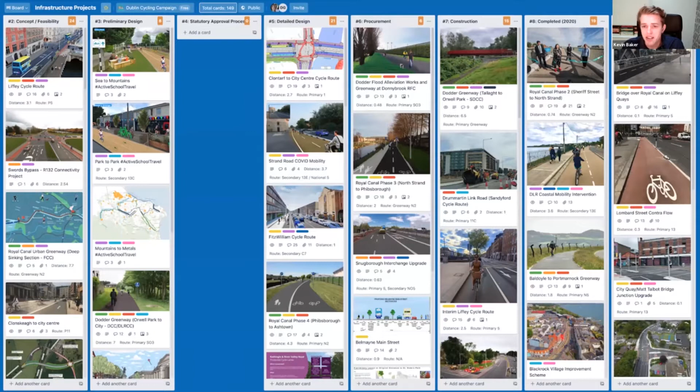So we took a lot of that information and combined it down into these next few slides.

At the same time, though, not every kilometer is created equal. We could build a whole lot of kilometers of cycle track that don't connect places together, that go through parklands that people don't want to cycle through. We could build a whole load of new cycle track in industrial estates on the west of Dublin, where very few people need them—well, people do need them, but there's not a huge demand—instead of building stuff in the city centre.

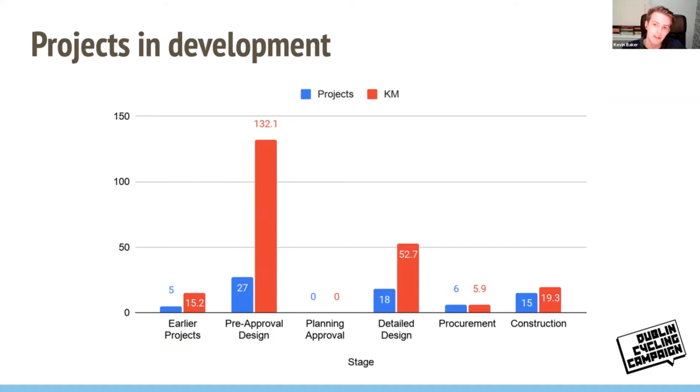Okay, so if we were to map out the cycle network that we have in Dublin right now, this is what it looks like. What I'm counting here is mandatory cycle lanes that are 24-hour, more than 1.7 meters wide - a proper painted cycle lane - and I'm counting things that are curb protected, and that's it.

That's not a network. That's little bits of green lines scattered all over a map. There's not a huge amount of stuff in there.

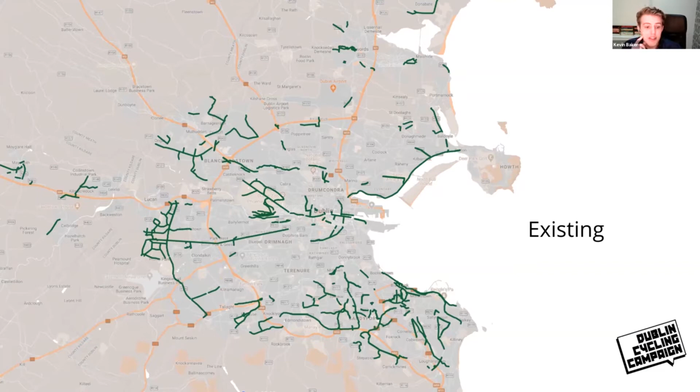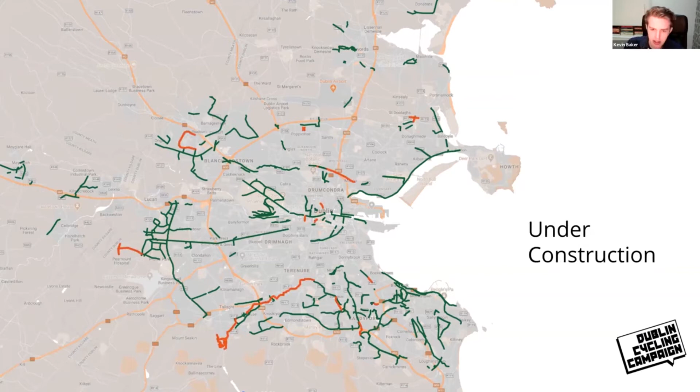Okay, if we add in all the things that are under construction right now, we get to that. If we add in all of the projects with planning approval, we get to this stage.

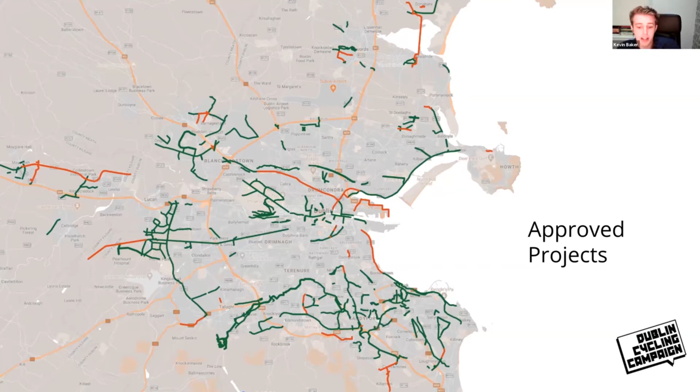So some of the things we see are sections of the Royal Canal in the city centre, Clontarf to city centre, the Grand Canal, the Royal Canal out to Maynooth, and kind of the Malahide to Donabate Greenway in the north there, and Strand Road - the big ones are in that list.

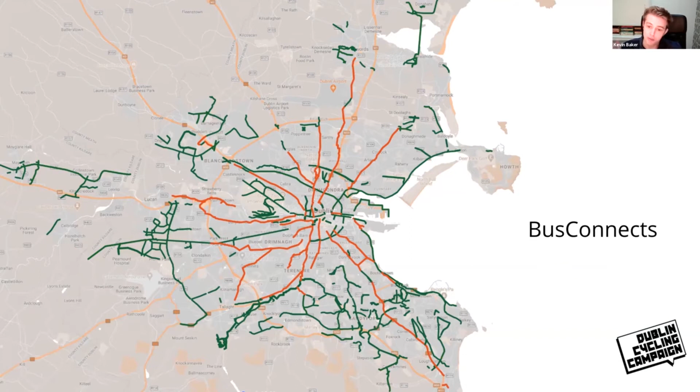If we add in all of the BusConnects plans, and that project is still a good few years away, and some of it might not be finished construction for 7, 8, 10 years from now, we get to that.

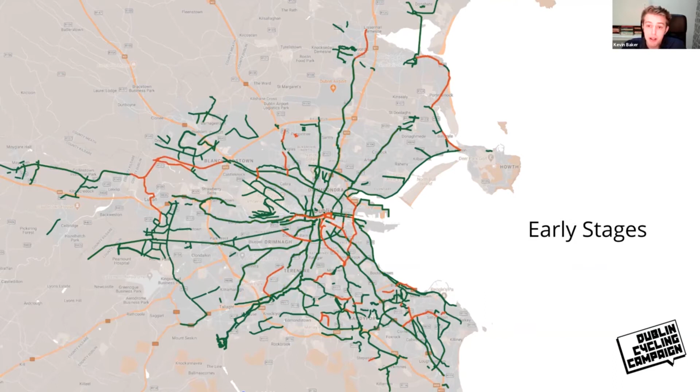If we add in all of the other projects that are in early stages of development that have some kind of published plan, we add in that. And so to some extent, if we were to take all of the plans we have right now and build them, we would get to this. That's starting to look a bit more like a network.

There's obviously still huge gaps in places. I think particularly if you look down at Dún Laoghaire and the bottom right-hand corner of the map, you start to see maybe the density of the green lines you might want to see.

To some extent, this is not about just building a cycle route from every suburb to the city centre. This is about making sure that people can cycle around their local area as well. They can cycle to the shops, they can cycle to meet their friends, they can cycle to the GAA club.

Obviously there's still lots of gaps in this. I think one of the big standout areas is Raheny, Artane, Beaumont. Besides the Malahide Road, there's no plans up there.

There's a big need for more stuff around Blanchardstown as well, around Tallaght, and other areas. To some extent, what we have in the planning pipeline is nowhere near enough to where we need to get ourselves. But that's okay, because to some extent we're saying we can build it in 20 years. So we still have time to come up with new plans and start moving those through the process as well.

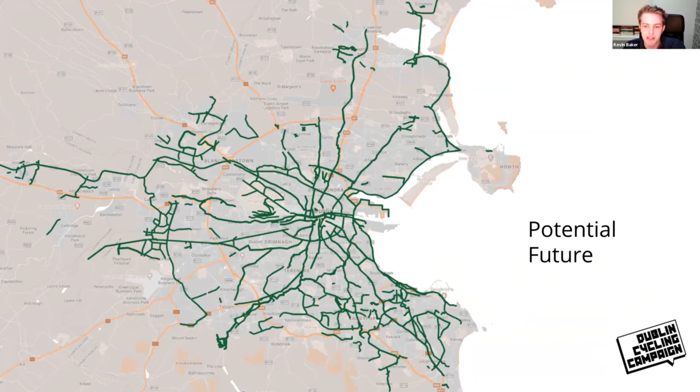Okay, so I suppose one of the big things about cycling infrastructure is it is a massive chicken and egg problem.

I have heard maybe not exactly this quote, but almost exactly this quote from far too many key decision makers in Ireland. I'm not going to name any names or any government departments, but I'm sure some of you could maybe guess: 'Cycling is a niche activity for a small subsection of the population. Investing in cycling won't make a meaningful contribution to Ireland's transport problems.'

And to some extent we hear this because they look at the numbers of people cycling right now, where in some areas of Dublin less than 2% of trips are by bike. In the city centre we're maybe 13%, maybe 20%, somewhere in that range. So it's a small subsection. They don't see the potential.

And so to some extent we've always turned around and said you have to believe this is possible. And the way we tell them to believe is by looking at the Netherlands. Look at the massive groups of people from all walks of society who cycle as part of their normal everyday life. Families cycling in the Netherlands is super common. So are older people. It is possible to do this.

So 'seeing is believing' is actually not the full quote. The full quote is 'seeing is believing, but feeling is the truth.' It's from an 18th century English philosopher, I believe. What he's saying is that seeing is only believing, but it's when you start to feel it, when you experience it, that it's actually real. To some extent, I think we're starting to see in certain points of Dublin this become reality. And as a result, it's much easier to feel this idea that cycling could be for everyone if we design for it.

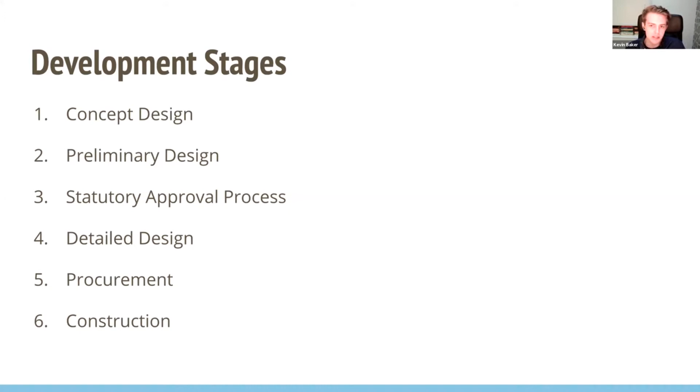The next step is procurement, where they take these designs, go out to tender, and get a contractor to build the project. The last step is construction. All these projects take some length of time to build - it's not uncommon to see projects take a year, two years, three years to construct on the road.

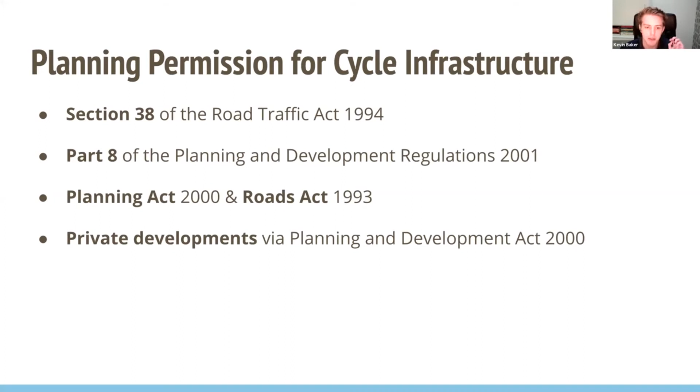I really want to dig into the planning process, because this can be really useful as we move into the final step about how to speed the process up. There are four main ways that cycle infrastructure gets built: Section 38 of the Road Traffic Act, Part 8 of the Planning and Development Regulations, the Planning and the Roads Act, and private developers. Let's dig into some of these.

Section 38 of the Road Traffic Act allows council officials to make changes to the road for traffic calming reasons, and this includes cycle lanes. They can only change existing roads - there cannot be any road widening. For the most part, they need to stay within the existing curbs.

This only needs the council official's approval. It's not a decision made by councillors. The approval process for this can range from anywhere from 2 weeks to 8 weeks. I've seen some projects take 8 months, but for the most part, it's very, very quick.

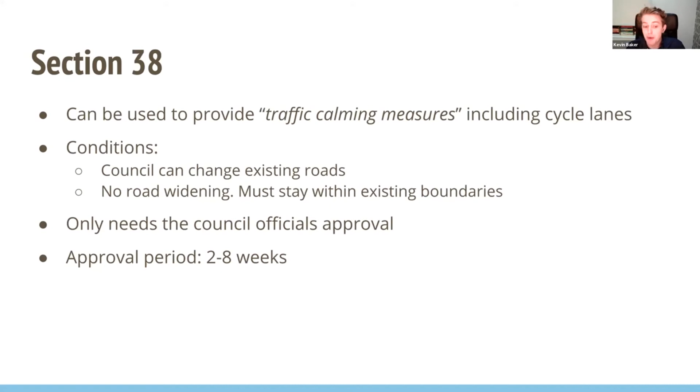So I'll give you an idea as to what can be done with Section 38. The contraflow on Lombard Street in the city centre is a Section 38. The Grangegorman Road Lower filtered permeability, a set of bollards to stop rat running on a residential road, is also Section 38.

The interim Liffey cycle route project - while the council officials did to some extent ask for the consent of the councillors before they built this project, they didn't need to, but they thought it was good practice to.

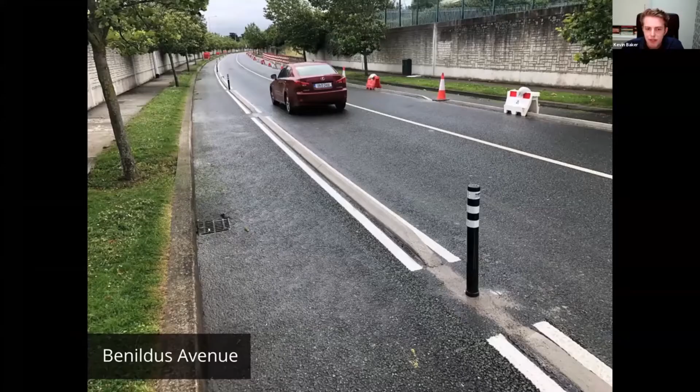The Benildus Avenue project in Dún Laoghaire, kind of in Sandyford - these new concrete curbs were done under Section 38. They stayed within the existing road. All they did was change the existing road.

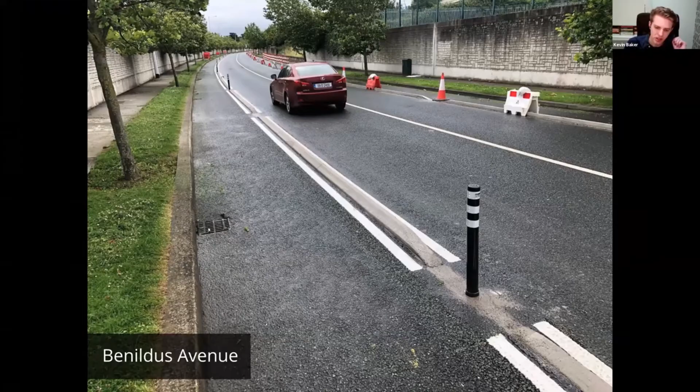And then, to some extent, the biggest and best example is the coastal mobility route. They took an existing 2-way road, made it 1-way, and installed a 2-way cycle track. Change within the existing road - they reallocated road space.

Okay, the next big one is Part 8. The council will take some project and effectively apply for planning permission to themselves. They publish the project, ask for submissions from the public, and the councillors vote to approve or reject the project. The timeline here is you need a proper planning application.

While a Section 38 does require some documentation beforehand, a Part 8 requires the same amount of planning application that you would need if you wanted to redesign your house or build a new commercial building. That planning application is a somewhat lengthy process that can take 3 to 9 months. The approval process is 20 weeks as laid down in the law, so that's about another 4 months. So Section 38 is weeks, this is months.

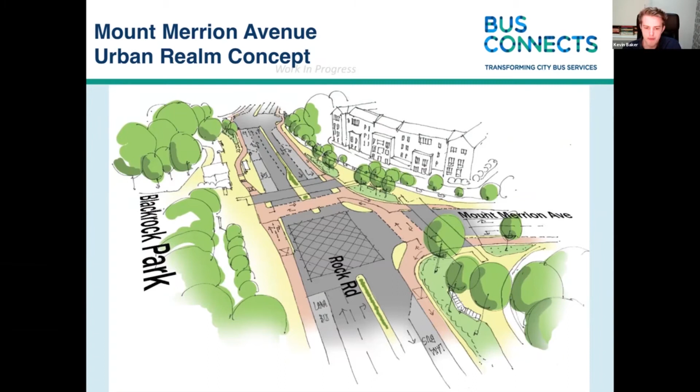Okay, the last smaller section is private developers, who can deliver some amount of cycle infrastructure. The quality varies dramatically - some of it's really good, most of it's not.

The other is developers sometimes build, if they have a large enough area, large enough development, they might build their own internal cycle network.

Okay, I want to run through just 3 example projects because I think they're really useful for understanding how some of these projects move through the process and where some of the delays come from.

The first one I want to look at is the Clontarf to City Centre project. It's a 2.7 kilometre project from Alfie Byrne Road to Talbot Street along North Strand. Anyone who comes from the S2S or Malahide Road knows this section of road is awful, particularly the section at North Strand Bridge, where I have been close passed every single time I have ever cycled over that by either a bus or a taxi. It's just an awful section of road.

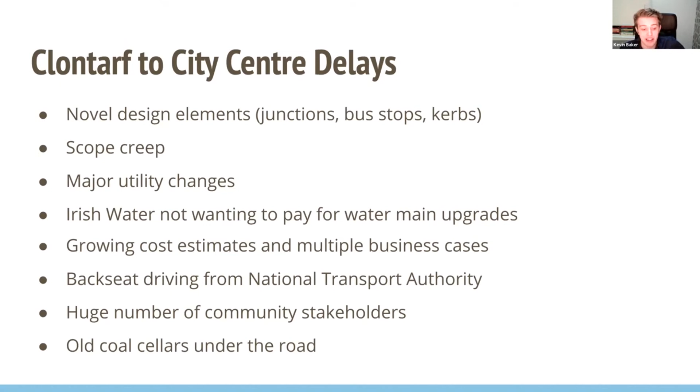There's a huge number of community stakeholders, and as this is an old road, there's a lot of old coal cellars under the road, particularly in the North Strand area, which they don't know if they have been filled in correctly or not. And so when you're trying to build a new road on top of them, the engineers obviously need to know what they're building on top of. And so surveying the coal cellars, I think, has slowed this project down by about 6 to 9 months, at least on its own.

So the timeline for this has been slipping a lot. The plan was not for this to take 9 years. So the way to read this table is: in September 2019, the original completion date was Q4 2021. The latest date we have now, from November 2020, is that this project will finish in Q1 2023. And as you can see, every month when we get a project update, this thing slips just a little bit further down the timeline. This thing just keeps not happening.

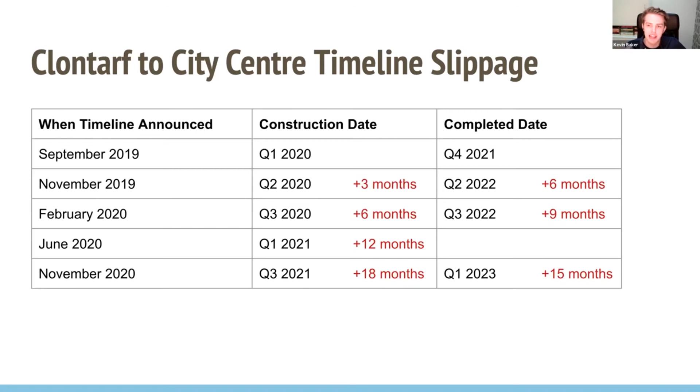Might also look at Royal Canal Greenway Phase 2. This is a fantastic new project. It runs from around Sheriff Street, through an old section of the canal that's been totally inaccessible for decades, under the Dublin to Belfast Railway, and then over another railway line to join up with North Strand Road.

This received planning approval in December 2015 and opened in July 2020. So it's about 4.5 to 5 years from planning approval to opening. There was about 18 months to 2 years of design work before planning approval. So we're looking at 7 years or so for this project.

Some of the delay reasons were Irish Rail and Waterways Ireland. Waterways Ireland own the canal, Irish Rail - they're going under one railway and over another, so they need to be consulted. I understand they are not the easiest state bodies to work with.

There was confusion to some extent as to whether or not the cycling bridge over the railway was tall enough, depending on the different versions of the Dart expansion plan being worked through - would that bridge be high enough to take double track electric trains underneath or not? That complicated the design. It was: can we make a decision? Can we not make a decision? This all slows things down.

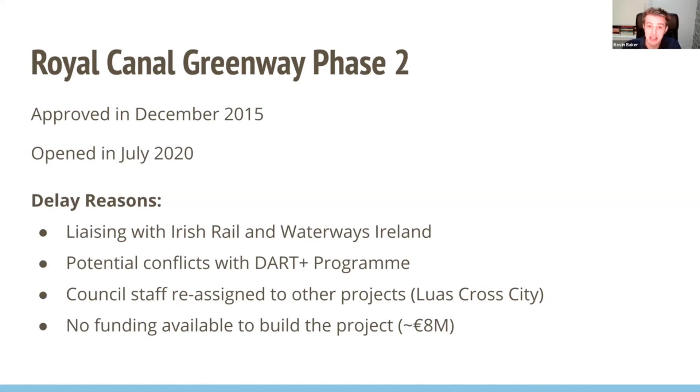I also want to look at a project that was abandoned - the Sandymount to Blackrock project. It was announced in 2016 and officially abandoned in 2018. The proposal was to build a two-way cycle track along Strand Road and out along the coast to Blackrock. This is part of the S2S and some other projects in the area.

There were a huge number of complaints - 680 submissions - of which only a handful were supportive of any aspect of the project. There were huge complaints about making Seapoint Avenue one way, which was just done by the Coastal Mobility Route. There were huge objections to some compulsory purchases required along Strand Road, Peoples Front Gardens, and complaints over a new road bridge in order to close Merrion Gates.

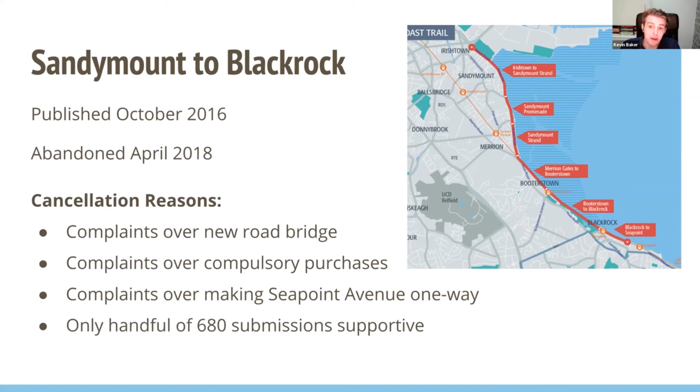Interestingly, their solution for Strand Road was to build a cantilevered boardwalk in order to maintain the 2 traffic lanes and provide the cycling infrastructure and a space for pedestrians. This is very different to what the Dublin City Council Strand Road project is today, which is to make the road one way with a 2-way cycle track.

I can tell you, if this project hadn't been shot down 2-3 years back, it'd probably still be going through the design and planning phases at this stage. From an infrastructural perspective, this is a very complicated project right beside the coast, which is environmentally protected. So to some extent, this project getting shut down was maybe a good thing, because it means we've cleared the way for the Strand Road cycle route now - this 2-way on-road cycle track - which is going to be built, I think the council last said, on the 15th of January next year. So we're very close to seeing that delivered.

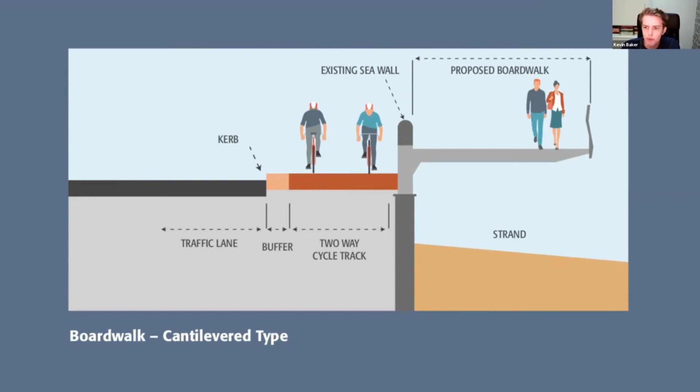Okay, so I want to talk you through what are the current plans from some of the key bodies here.

This is a cycling implementation plan 2020 to 2024. It was written by the National Transport Authority, but it was never published. We received a copy using Freedom of Information. This was never published because just before they were about to publish it, the pandemic hit and we realized that transport was about to change dramatically, and so this plan really didn't make that much more sense.

The other thing that has changed since this plan was written is we have a new program for government, which includes significantly more funding for cycling.

One of the interesting tables in this whole document is about the amount of time it should take projects to move through the various stages. Their idea is that it should take 3 to 4 years for projects to go from the very first stage to completion.

I'm going to be pretty honest, I've never seen a project move through the detailed design phase in 6 months. The shortest I've seen is 9, and many projects have spent 2 or 3 years in detailed design. So to some extent, this timeline in the NTA's cycling implementation plan is a little optimistic.

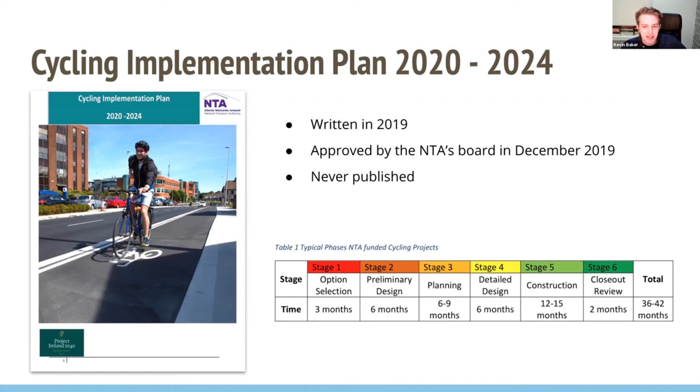To some extent, they started trying to do the maths on estimating how much cycle infrastructure they could build over the next 5 years. They think in Dublin they can build about 110 kilometers, with another 50 kilometers from Bus Connects. So that's 32 kilometers per year. That's pretty much what we've done in 2020. So what they're saying is we need to do a 2020 every year.

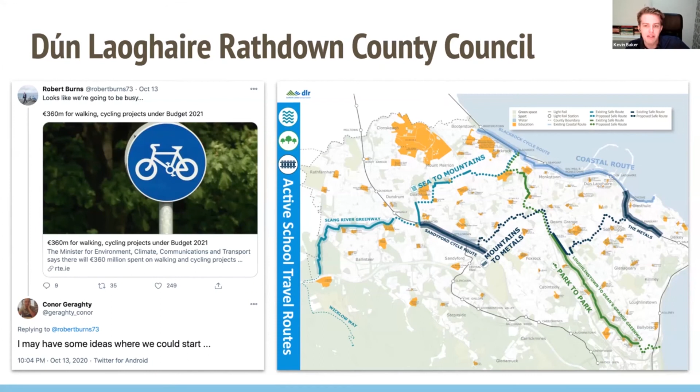And Conor Geraghty there, who is responding, was the lead engineer on the Coastal Mobility Route. So to some extent, I think they are probably already hard at work figuring out what they need to do in Dún Laoghaire. Fingal County Council are definitely on the right track here.

They just appointed a new Director of Infrastructure, Dave Story, who is leading a new team that looks very similar in composition to Robert Burns' team in Dún Laoghaire.

And as far as I understand, they've been out to Dún Laoghaire a few times to kind of figure out what's been working for them and how can they replicate it. To some extent, Fingal are absolutely on the right track.

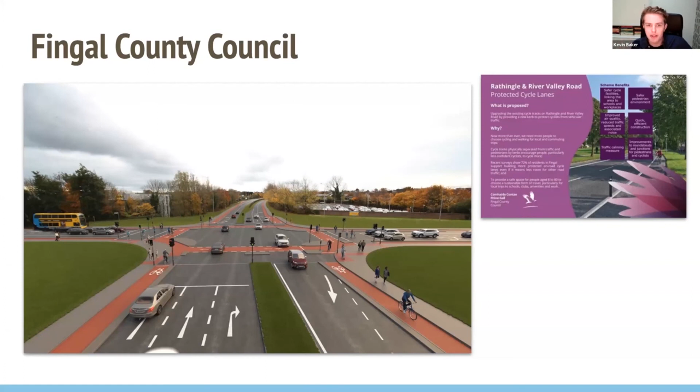Okay, so how do we speed up delivery? We need 3 things: designers, funding, political will. We have the funding. While I think there is a shortage of staff in all of the county councils, we have the staff.

And this cycle spins. If we take something like the Clontarf to City Centre project, there was the political will to approve the project. We have spent 9 years investing in the project, both in time and money.

And we have not gotten anyone cycling. If anything, lots of people have quit cycling that route because of the amount of road danger they've experienced.

It's a very slow way of turning the wheel. How can we turn the wheel faster? How can we get more people, maybe in the enthused and confident category, cycling more or more often?

How do we get those quick wins that are needed to get some of those people who are interested but concerned cycling? Because if we do that, we have spun the wheel. We've spun it once, and from that, it's easier to spin it again and again and again.